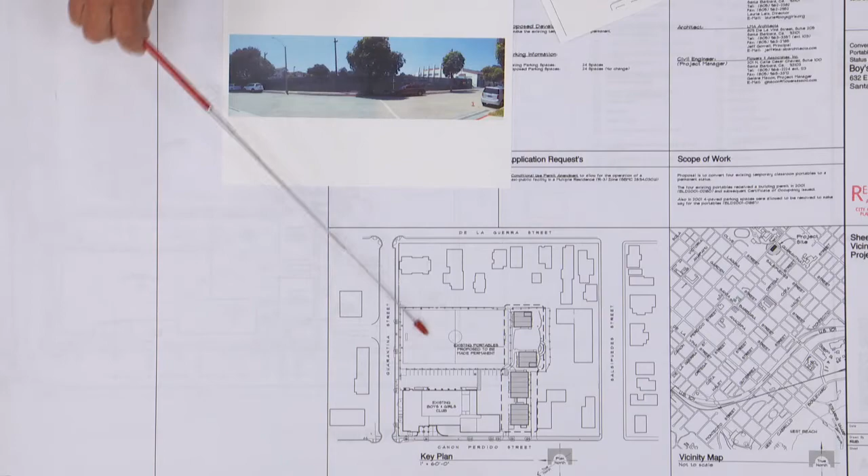What you're looking at here is a photograph taken from this street, looking this direction. You can see the fence and hedge along here. The portables are on the opposite side. Sorry, this picture's taken from this direction. Oh, okay, so we're not seeing the portables. Yeah, you're not seeing the portables.

Classroom. The classrooms, you can see from, let me see, I'm at Canon Perdido again. This view is looking this direction. That's probably the only prominent view of the classrooms, from Canon Perdido, right at that location.

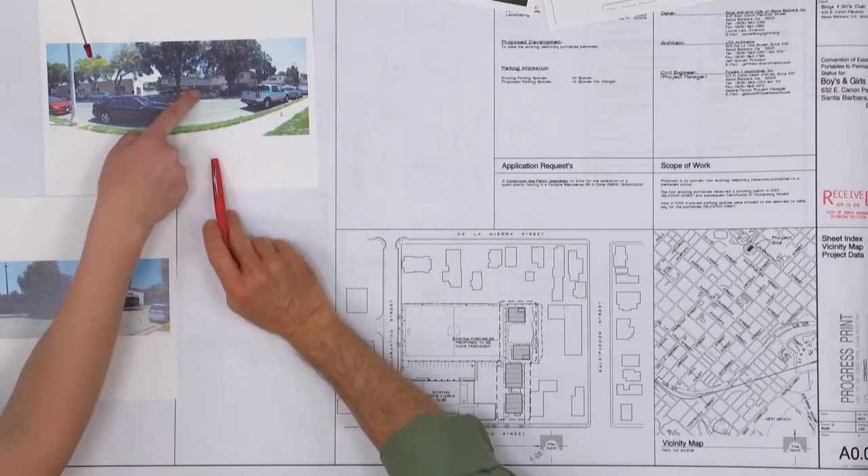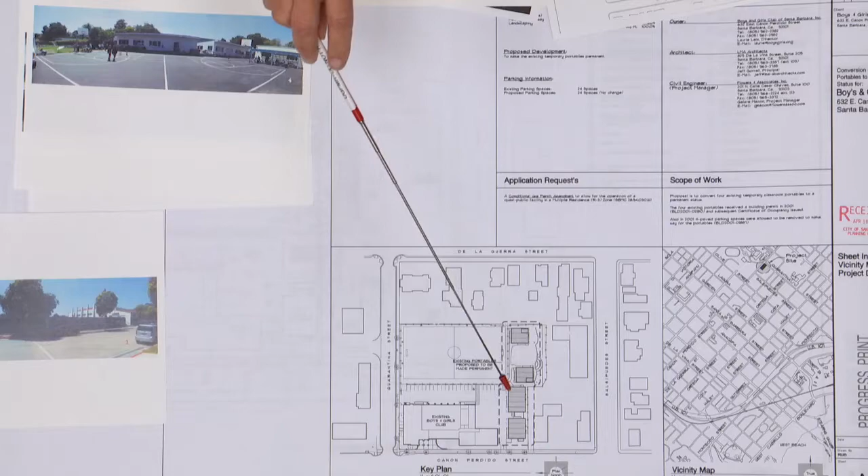And that would be, okay. If you stand and turn around, then you're looking at the high school. That's the view you see there. You go inside the campus, and these are the classrooms, and this is a view looking out towards the play area and parking.

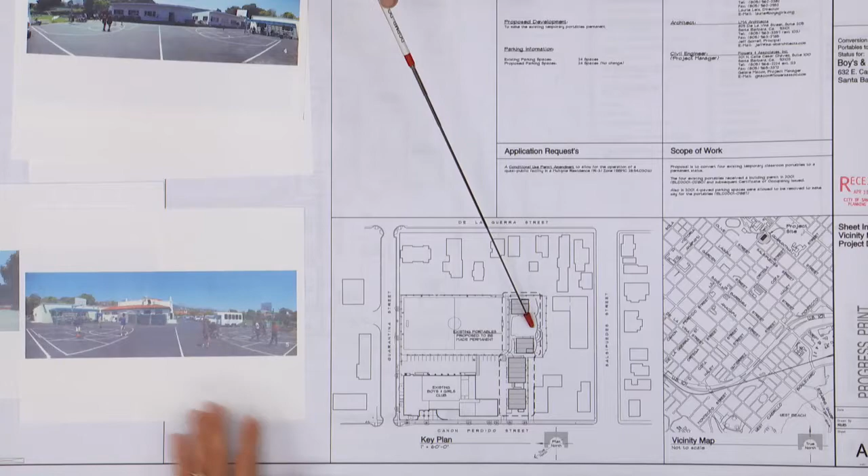Another view. And then I know oftentimes we like to stand on the site and look backwards to see if you can see them, they can see you. This is a photograph standing inside this area of the classrooms, looking back out this direction. And there's a tall hedge there. That's this picture. That hedge you see is a tall hedge right here, and that's the corner of the classroom right there. Correct.

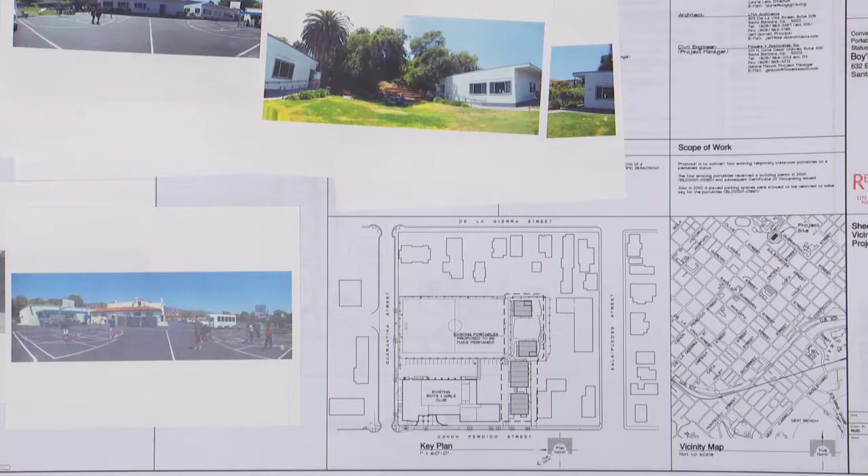There's an apartment complex up at the top of a pretty steep hill here. This is a view from the classrooms looking back towards the apartments. This view is standing in the parking lot looking back towards the houses. Another view from inside this area.

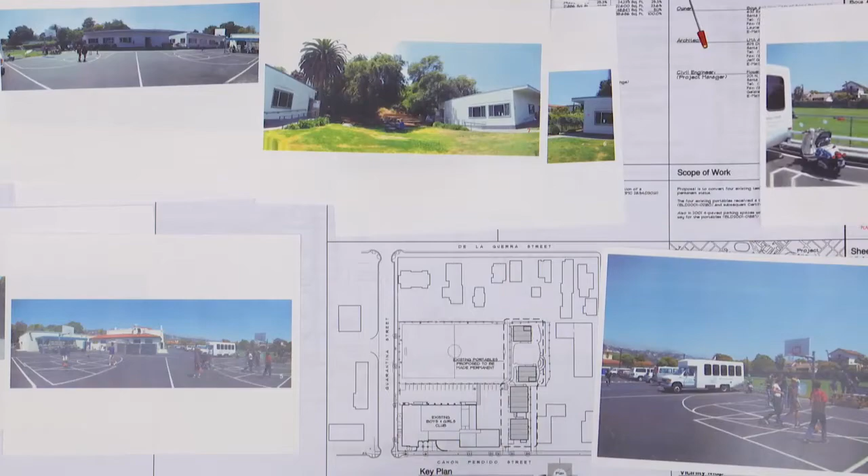And then this view is what you see as you're driving by on Canon Perdido, driving this direction. The portables, or classrooms rather, are back in here. This is a view as you're walking along the sidewalk looking this direction.

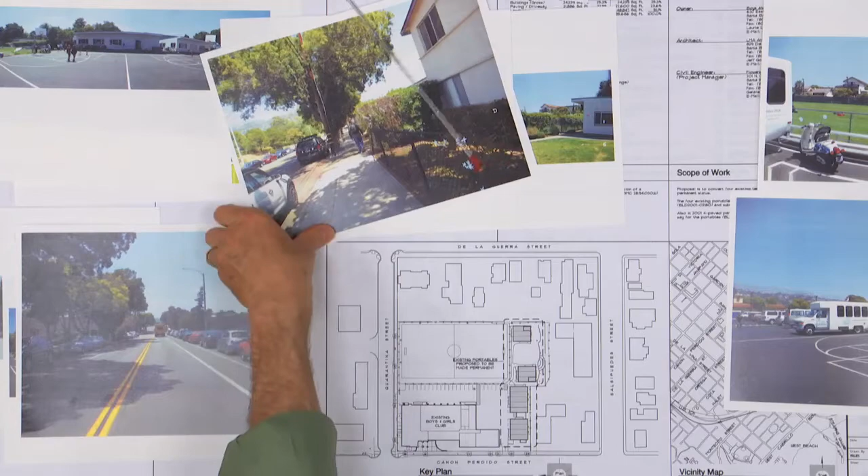The apartment complex that is right next door—this is the view if you're walking on the sidewalk looking this direction. That's the apartment complex, and the classrooms are right around the corner. This last view is from Canon Perdido, looking up the driveway of the apartment complex. There's a high hedge along here, and then it drops down for visual sighting of the cars as you go by.

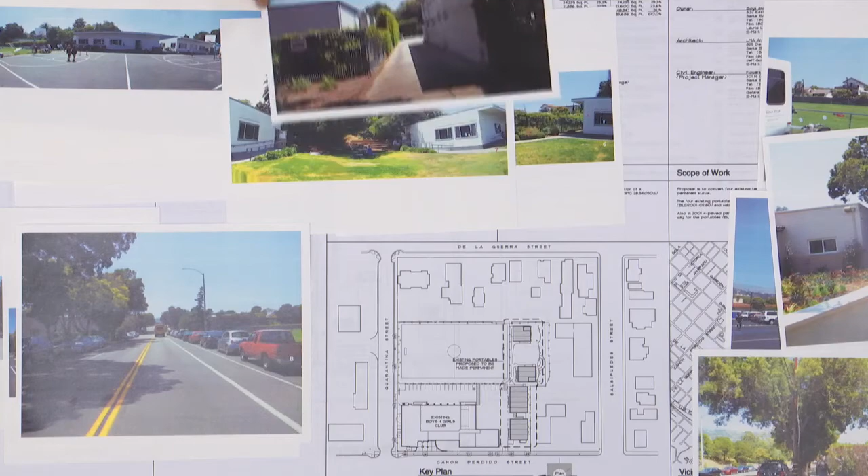So really, there was one photograph looking straight on in this direction. That's really the only view that you have that's of any real consequence, I suppose, in terms of the public viewing it.

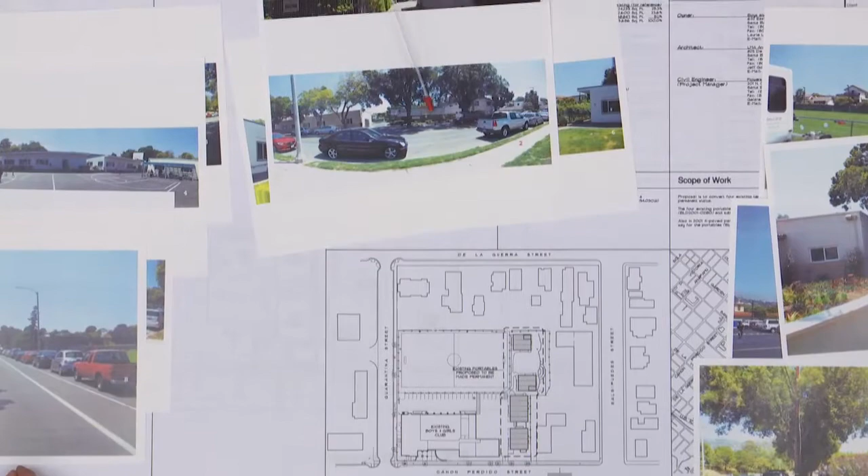So it's a little bit hard to see, but there's a fence in front, looks like. That's right, there's a fence in front, and a little bit of landscaping. These two trees are those two. That's correct.

How about from Salsipuedes—is there a view looking back towards the classroom? There's not. This is a very, very steep hill up this direction, so you can't see anything.

So I think that's pretty much it. What we would hope for is if perhaps you could see any enhancements and support the classrooms. Are you proposing any enhancements? We're not proposing any enhancements—we're coming in as an existing facility, hoping to make the classrooms permanent. And if you could see anything that would be of help.

This thing? Well, this is the same street. The view from Canon Perdido, would it be this one? I thought it was. That would be the view, at a right angle.

Does that complete your presentation? It does. Okay, so we'll open public comment. Is there anyone here that would like to comment on this project? Yes, we have one.

Are these going to be—you need to come forward, and we need to get your name. My name's Sarah Robinson, and I live at 6... You need to speak into a microphone and take a chair. This is my first time, sorry. It's all right, she needs to speak into that. Applicants can move to the seating momentarily while we're taking public comment; the applicant has to go into the audience again. So, yes, my name's Sarah Robinson, and I live at 615 East De La Guerra.

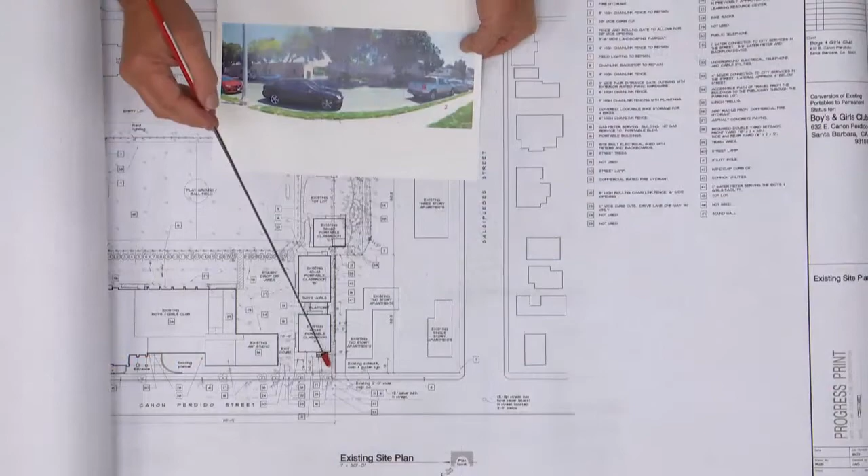This fence along Canon Perdido Street shows better in the photo. Can you point out on the plan where that actually is, where it stops and starts? It's somewhere in here, I think about right in here. Is it out at the sidewalk, or? It's back, not right at the sidewalk. It's back right about here.

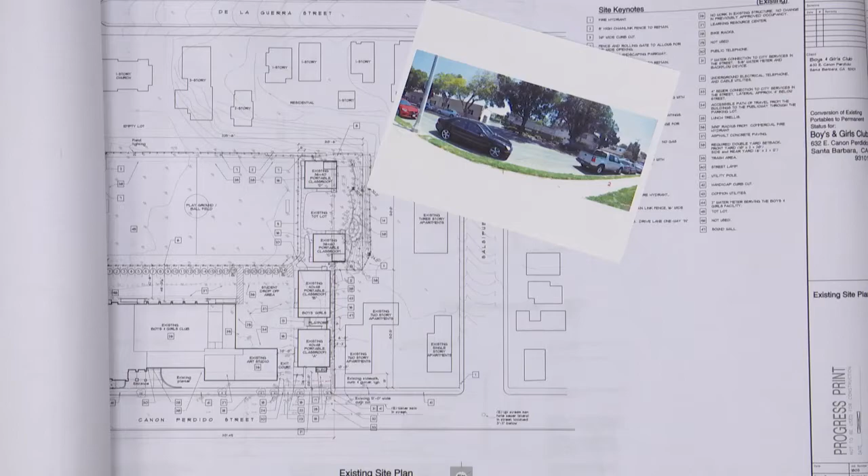It's kind of in line with the art studio, is that right? Somewhere back there, yeah. Is there a hedge in front of it? There's some, I don't know if those are yuccas, kind of hard to tell from the scale of the photograph. This one you can see it - there's no hedge, just some vine, and there might be yuccas in there. Is there any lighting in that area? Yeah, there's lighting on all the outsides of the portables.

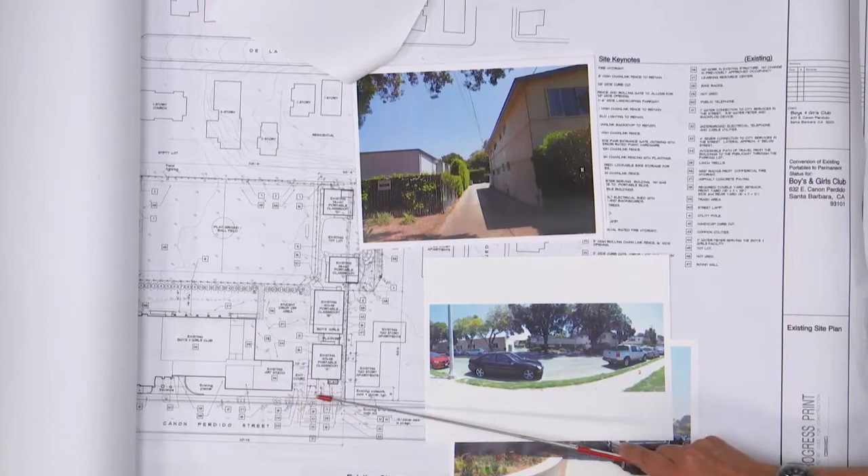From what I see on these photographs, you don't have much landscaping. Along here, or along here to this corner of this permanent building, is that correct? Would you be willing to commit to enhancing that landscaping?

We already have plans. We've written a grant to Santa Barbara Beautiful, and we're in the final stages of them helping us with the project. I think they're going to provide irrigation for us, hopefully, we'll find out within the next week or so. I've been talking to Duke, and once they put in the drip irrigation, we had to pull everything out because it was high water, and we're trying to be observant to low, drought-tolerant plants. So we pulled everything out. We're getting drip irrigation and putting in drought-tolerant plants, we've already done it with the front of our building, but we're planning on extending it to that part too.

So will you be including that in these drawings? Because you're not really supposed to be doing landscaping of an existing commercial facility without getting a permit. Oh, yeah, no, we just pulled out the stuff because the sprinklers were spraying all over. Sure, that makes sense - green water, yeah. Okay, thank you, no other questions.

Was the fence installed as part of the temporary structures? That's been there, I think, for a while. Jim, has that been there for a while? I didn't hear the question. The fence in the front - was it installed as part of the temporary or permanent classrooms? At one point, yeah, since 2001. Okay, the answer seems to be yes.

I guess these were installed for temporary use. Was there a plan to renovate the main building, and that's why these were put in? That's my frustration with this project. El Montecito came in with grand plans to build a permanent structure, and these were going to be temporary. Then they abandoned it, and we're left with the portables. Then Providence came in, and the same thing happened - they had grand plans to build an extension, they were going to pay for it, and then they couldn't get the funding. So now we're trying to make use of, maybe, hopefully we can raise money in a capital campaign, but for now it would be great to have these for our kids or the community to use for other interests.

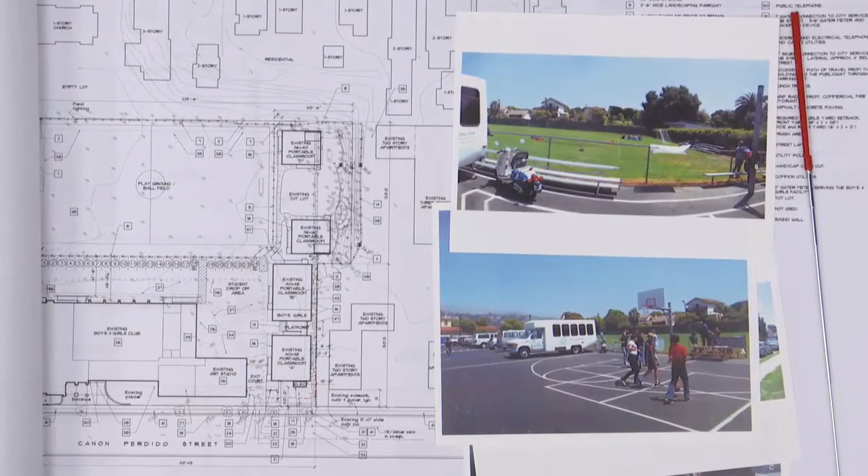Well, I don't have one looking directly behind it. What you're referring to, put it so it's under the camera. If you get back behind the portables, it's so dense with vegetation that you can't see anything.

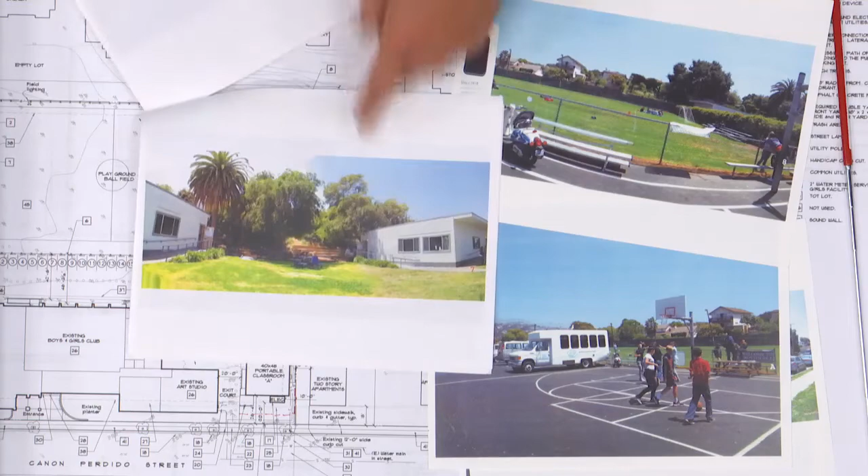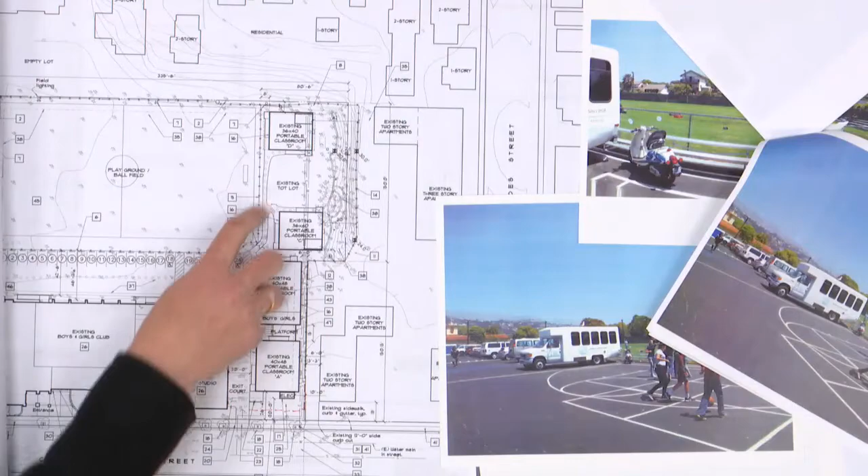It's kind of like this, where we're looking back at the apartment complex. I guess that's the part I was trying to clarify, because she was saying they were trimmed down and she lost all her privacy after that landscaping was done. Her home, I think she was saying, was over here off Salsipuedes, to the east of Building D.

Did she leave? I think so. Oh, I'm not sure which one it was - one of these properties along here. Yeah, because there's nothing been cut down through here, it's very dense vegetation. If you look on the survey too, a little closer, there's a tree there, but it's on your property line according to the survey, and the fence is actually on the backside of the tree. So maybe she was confused, assuming because the tree was on the other side of the fence that all that was on her side too.

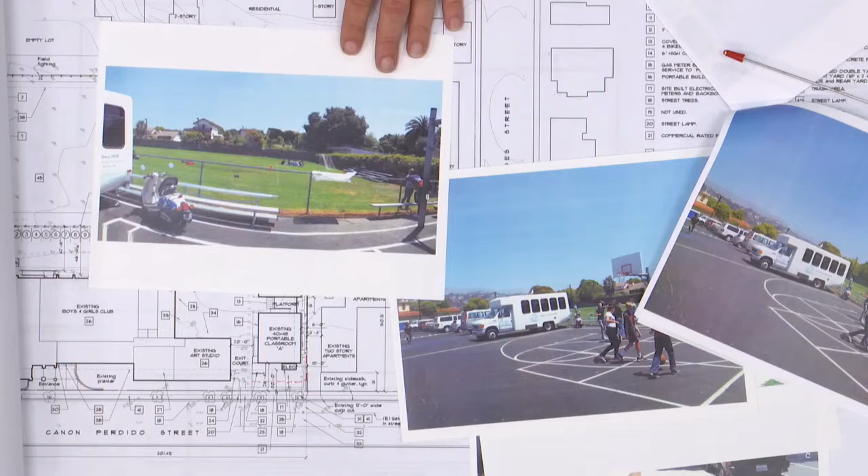I'm just curious if the vegetation's still heavy there, or if it's possible to see anything. It is heavy, yeah. Okay, no further questions.

So these were permitted in 2001 and built in 2001, or in place? I think they were in place from 2001 on. Okay, so 17 years they've been there - been there a while. And the temporary nature of it, was it a 10-year period they were permitted for, or what was it? 3 years.

Madam Chair, they were originally approved as 3-year modulars because the original plan was to propose a new formal permanent building. Since then, they've had trouble getting the funding together to build the permanent school, so the city's worked with them and provided extensions. But at this point, we've been saying this is going to be the last extension. It's a hard spot to be in because it's such a good use, the collaborative effort between a nonprofit school and the Boys and Girls Club.

So their solution right now is to see if they can keep them as permanent. Once they submit for DART, it'll go through fire department, SWMP, ADA accessibility. So although they're not proposing anything, there might be some things that will have to be addressed as we proceed. But they wanted to come in today and get comments from you guys to see if it was even worth going forward with trying to keep these permanently.

I see, it's a little awkward. Thank you, that was helpful. All right, comments, Howard?

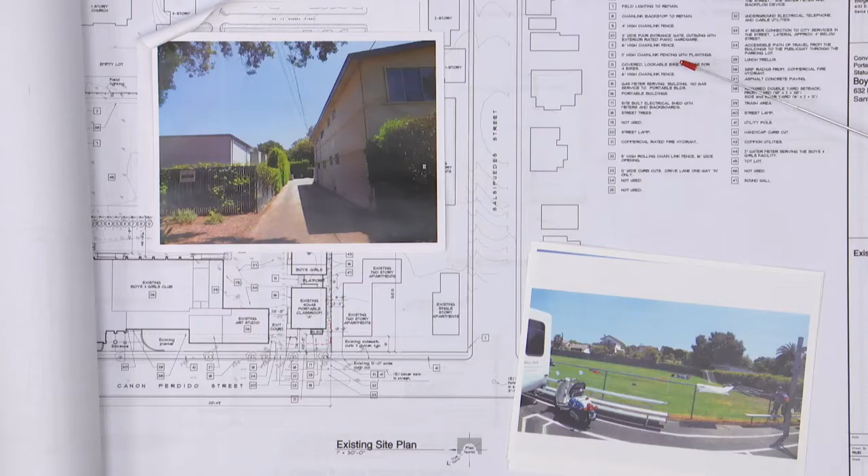I think that just some maintenance on the buildings need to happen, especially in this view where it's close to the street - the fence looks like it's temporary. I would say either install something that is more permanent, or you could go the planting route where you could plant it out so it's more of a hedge in front of the chain link that you don't need. But I'm kind of in the same thought process as Bob, because we do see a fair amount of temporary structures, and then you always wonder if they're going to become permanent structures.

It's just a way to make sure they still have the integrity that we hold all the other projects to, basically, that come before us. But I think that some maintenance would help. I could support these staying in use for another period of time. Okay, David?

I agree. I think the only aspect that concerns me is the long-term effect. I think there's potential for it to create a precedence where other applicants who come by see this same type of proposal and say, oh well, you guys were able to do this at the Boys and Girls Club or whatever project it may be. We've seen things like this even at the desal plant, where they had a temporary structure, so it's come up.

I don't know how that gets rectified, and I think from other situations we've had a hard time establishing how that even gets worked into the approval. But I would support it. I'd be more inclined to support it if it has some kind of programmatic goal, to keep it loose - it doesn't have to be a defined master plan or anything like that, but just the intention that they will eventually become something more permanent, or they will be something permanent.

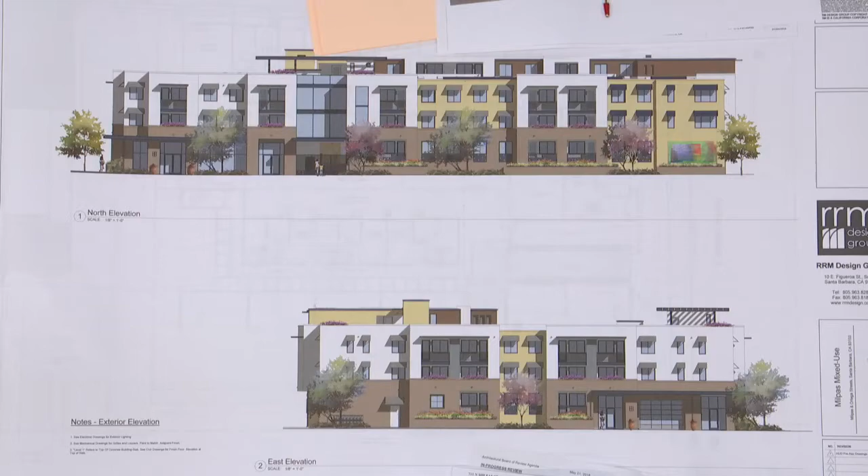Do we have that previously approved? We do, and in the back here I've included a site plan.

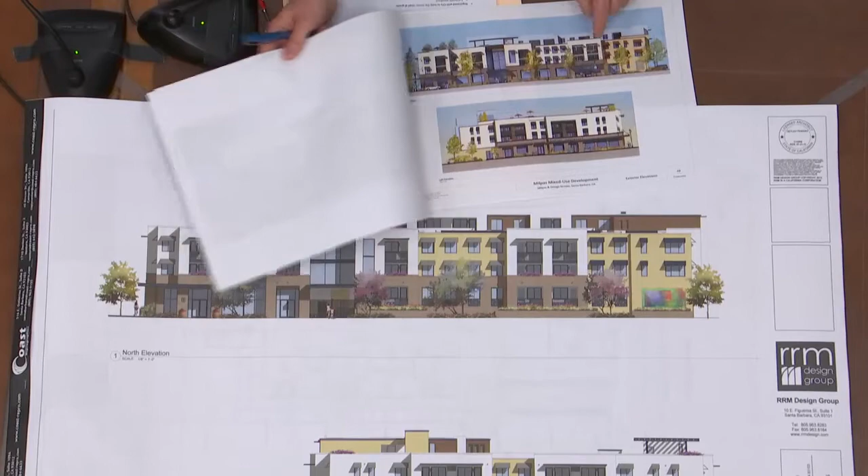I was searching for them and was unable to locate them, so in the 8.5 by 11 I sent you are the former elevations. These 11 by 17 are the former — well, you see the proposed. This is an earlier proposed version when it was kind of red plaster, and then these are the elevations with the brick. The final? Yep, the final, approved. So you can compare these with these. We opted for 11 by 17 so you can see them both together and go back and forth.

Lastly, this is the final, approved previously in 2016. The board had requested that the ground floor be brick as opposed to plaster. I think we had shown, included in that package, an earlier sketch where we had kind of a terracotta colored plaster, and I think someone made the suggestion, well, if you're going that route, why not just do brick? And then everyone said, yeah, let's make it brick.

We'd like to propose plaster. Santa Barbara is a plaster city — all the finest buildings are plaster, it's a wonderful material. Brick seemed to me like an odd choice. There is that one brick building at Haley and Milpas, and then further down by the freeway there's one smaller storefront, but it seemed like an odd choice. I don't remember ever in my 4-year term on ABR ever mandating that a project be built out of brick. So it's a different board. We'd like to just take the temperature of the board and see if there's any consensus that plaster would be an acceptable material for the project.

We have landscape plans if there's time, and we can go over details, but in the interest of saving your time, we'd like you to focus on these biggest changes and get your feedback on that. We'll be back for a full final review at a later date. So that concludes the presentation.

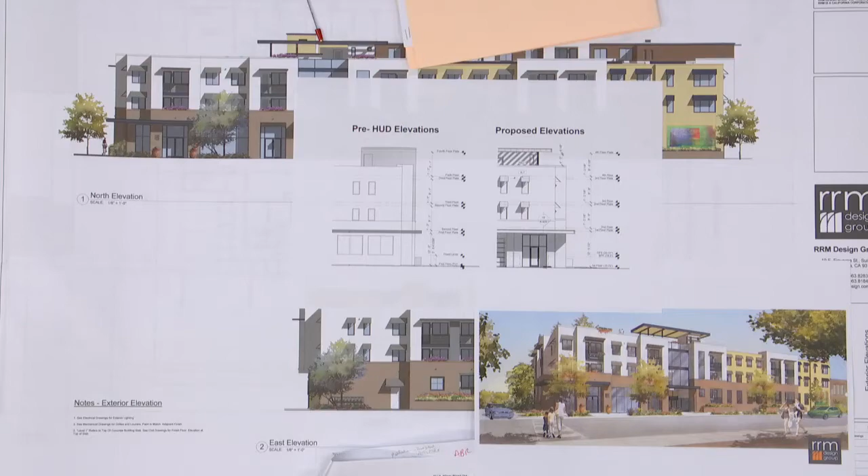And you set the building back? We moved this wing of the building back to the side of the entry, back 3 feet. It was important to have some uphill buffer on the Milpas side, the wing back. Exactly, yeah. And as Milpas heads up that way, it's already transitioning to more residential.

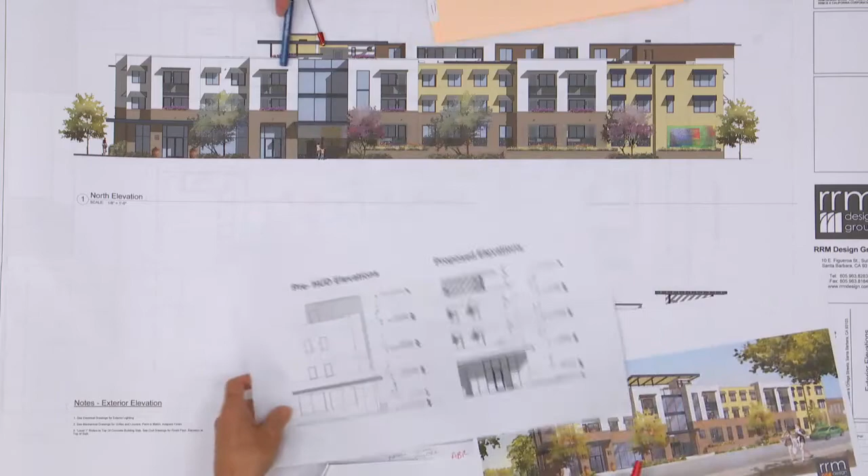What is the material of your awnings, and did they change? They are still the corrugated metal that was approved, with a metal frame. And then there's some sunshades, which are kind of prefab aluminum awnings up in various locations. Prefab aluminum, like what does that mean? They're a boxed awning with fins inside them that screen the sun. I see, okay.

There's no fabric other than the umbrellas that you show on the roof? It is, I guess, a fabricless building, yes. The fabricless building.

And did you modify the parapet detail? We did, well, we modified several details. One of the main things we did at the back of the project, Howard, you have to get flipped to the elevations, I think, in the sheet.

So the back of the building, this was a uniform height back here. We ended up popping up a piece of parapet to help modulate the edge of that, which works well for our crickets behind there, for the gutters and things.

So the parapet height changed a little bit. I think we were able to pull this gutter down, and this is still the max parapet height. And that's just a clean plaster edge with no flashing.

So there's one that's clean plaster, and then what is the detail of this other one that has a reveal or shadow? The other flashings are painted sheet metal.

These scuppers are not functional? Those are the overflow scuppers from the decks, and they're kind of a brass decorative tongue element. They're kind of cool. And so then the height of this parapet is determined by the 42 inches required from above the roof decks? Decks, yes. And that's the same as the entitled drawings.

No further questions. Okay, thanks. Kevin?

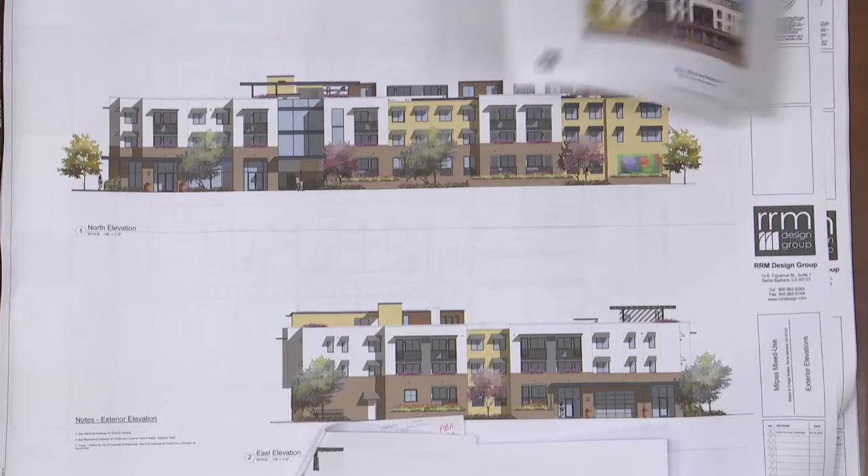Yeah, while we're on the elevation, so on the previously approved color elevation sheet, does somebody have one of those? Third sheet in here, on what's called the front elevation, which is Milpas. If we compare that to the new north elevation or proposed, what's going on the top floor?

There was some vague description of what's going on up there, now there's some more development. Is that different? Well, it's the exact same. I think this elevation took some artistic liberties and faded it back so you could read what you really see from the street, from above the parapet back, that's on the other side of the courtyard, so you're looking over the top of the building. So it's not anything you would perceive from Milpas. But the design is essentially the same.

Are the materials, there's some horizontal siding kind of recessed back in there, is that all consistent with the last design? Correct, yeah. If you look at the back side of the building before and now, it always had the horizontal siding, it turns the corner and wraps back facing the junior high. It's just not shown here, it's ghosted out. And it may have been shown in a section view at another point, I'm not sure.

About the brick, I mean that was originally a veneer, probably, of some sort. A lick and stick, yeah. And is the desire to change truly an aesthetic issue, or is it a budget-driven issue, or is it a bit of both? You know, it's all of the above. It's this design with so many piers and recesses doesn't lend itself to applied veneer brick in the corners and getting the modules to work out. And frankly, we didn't think the brick was the best option visually. It feels odd for Santa Barbara, honestly.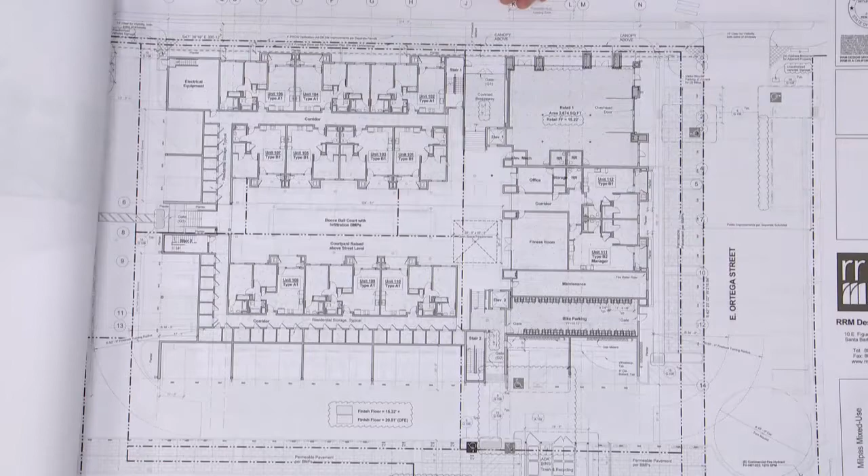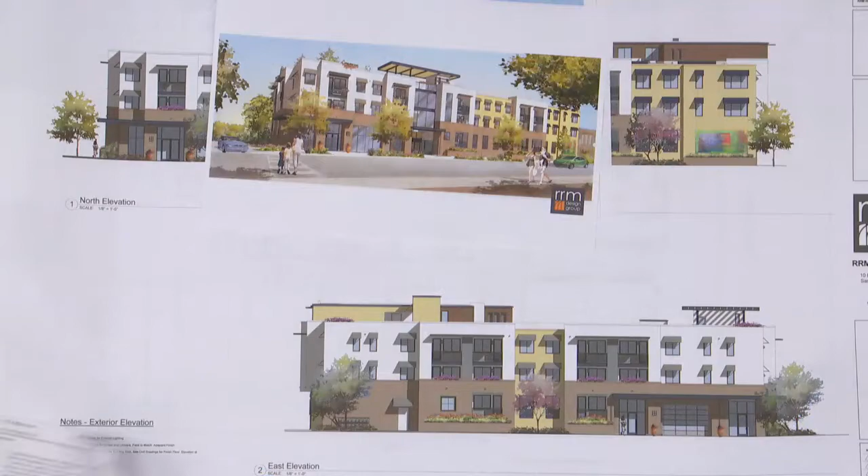So there's a canopy that projects out several feet, and then set deep within that is a decorative gate. A visitor would walk up to this gate, ring the buzzer, get let in, and then walk under the building and up some stairs or the elevator. Exactly correct, you can walk up to the courtyard level or hop on the elevator right there.

And once we went that direction, it felt really nice to be able to look through and see light through the building and the prospect of a green courtyard in there.

Then this glass railing looks like up top there. That went from a metal work to some sort of glass. Yeah, it's a glass railing at the top of the roof deck, and we'd love to hear your comments on that. We felt it was a nice continuity, to have the same material all the way up. We're open to suggestions there.

Did the window proportions change a little bit? Did they get a little more square, or are they the same? Are you talking about the commercial or the residential? On the north elevation, in the window fields. Maybe it's the awnings that are making your perception different. They've always been 5x5. The awnings look like they're overhanging a little bit more, maybe that's changing your perception of it.

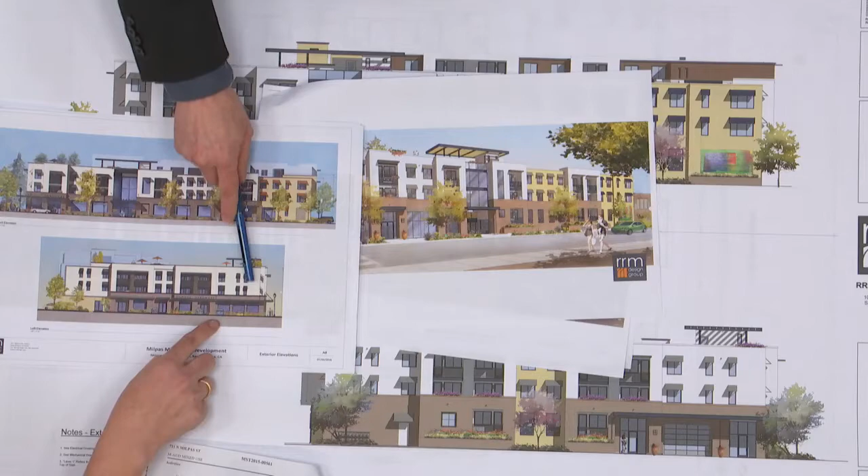Okay, and this is the updated plan. So now further down, there's a parking access that wasn't there before. So we've opted for a big rolling-up garage door to make that retail space flow out onto the street, which might be nice for our tenants. Right here, these are the two new residential units on the ground floor, 5 feet above grade.

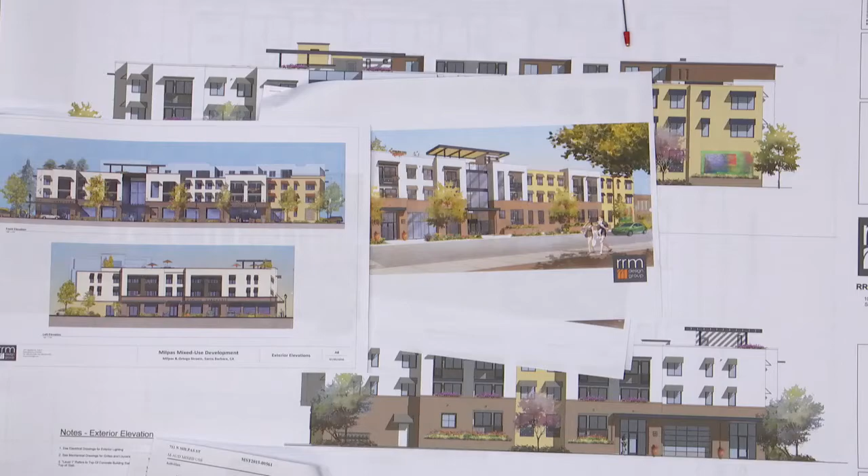Since we're on the atrium, if you look at it real quick, the last time it was approved, the spacing of the channels were a little more evened, and now they feel like they're pulling up towards the top of the atrium itself. Is there a reason for that?

I'm not sure I understand your question. You go to the elevations, look on that sheet. Oh okay, here you can see the two different ones. Yeah.

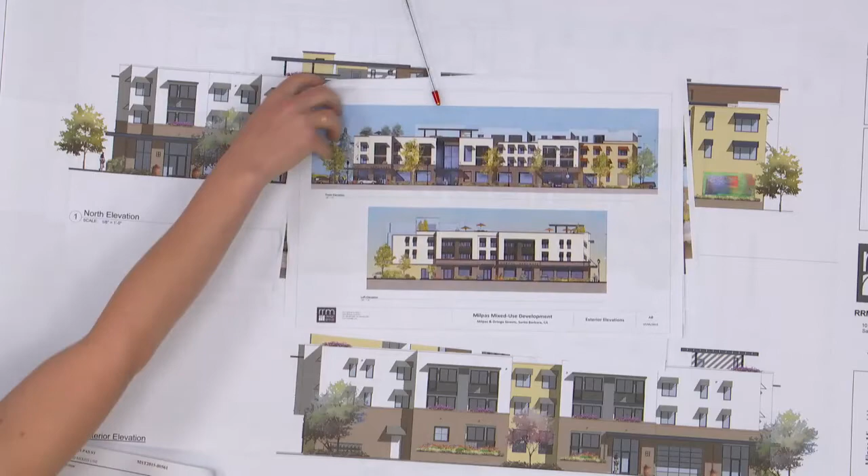Spacing was more even on the last round, looked more balanced, and now it's raised up higher and squishes at the top. And there wasn't glass up there. Yeah, that's something we could study. We could raise it up a little bit if there were issues with wind load and the structure of the curtain wall that needed that intermediate channel to help support it.

On the east elevation, the previous iteration had this piece of metal awning that projects off the wall where the roll-up doors used to be and runs across, carrying over that door. Now it looks like it's pulled back a little bit. Once we added residential units here, the awning didn't make sense to continue over their windows—it'd be so deeply shaded. So we pulled it back to just cover where the residential or commercial portion is, and took it off on that other massing right here.

Yeah, exactly. And I believe one of the comments was to look at removing the awnings at ground level on one of the elevations. We looked at that—they're still there, and we thought about it, and we're open to removing them.

In Santa Barbara, the grid is 45 degrees off north, so everything gets sun at some point. So it made sense to keep them, and visually they're a nice decorative element—they help because of orientation to protect those windows a little bit. There's no true north, so when you say north, it's still getting hit in the early morning.

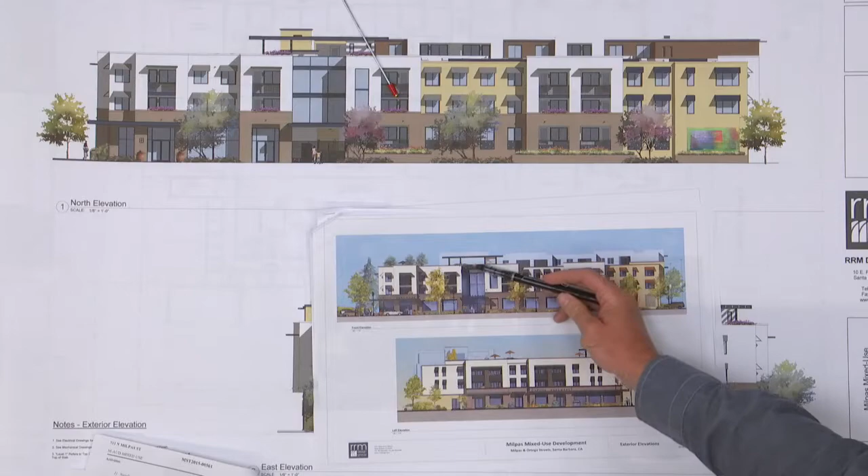Now it's a building that's much more commercial, much more flat and dull, especially in areas like this, that just reads very commercial and very ordinary, whereas this had some unique detail going on there. There was a hint at some textured railing there that could be really nice.

I would really hope that you could add some more of that back into the project. I understand there's financing involved, but it also needs to gel better with the community and not be an ordinary development. I think that was really the bulk of my comments.

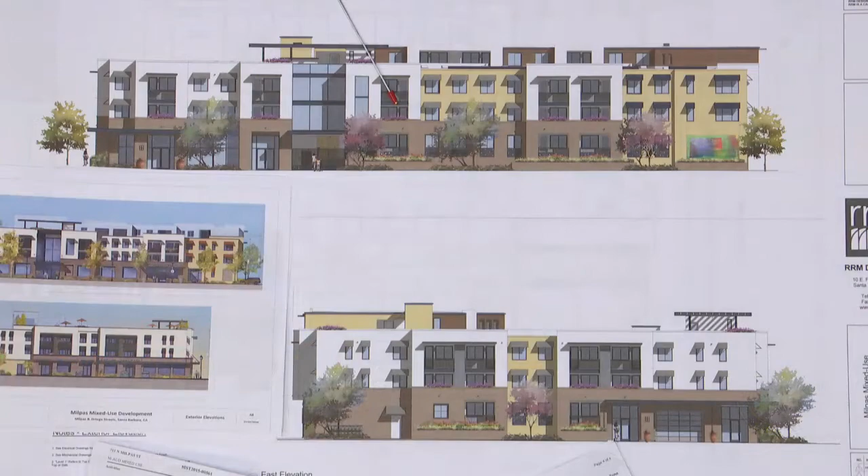I guess first off, I completely agree with what Kevin was saying as far as the materials and how you're breaking up this massing. It does totally change how you read the building, because before we were looking at pieces and how to break up that mass, especially on Milpas.

But also, I think that especially with Milpas being such a pedestrian-friendly street, to lose all the commercial on that street is kind of a loss to the project and the interaction. Looking at this as a mixed-use building, before you had all this glass open to the street, so if you're walking down, there's more of a relationship between someone on the sidewalk and what's happening on that ground level. I think it's kind of a loss for the project and the neighborhood and where this is going.

That's kind of a big piece for me, because before it was really open. Now, I understand what you did and why you did it, but I think for the project and for the neighborhood, it would be a loss to lose that, to lose the commercial downstairs.

And I agree with sort of the rest of the comments about all the detailing and everything that we had seen previously, especially up here at the top where that glass is, and just how everything is coming together. I think you need to take another look at how they separated the building with the colors and materials, and revisit that.

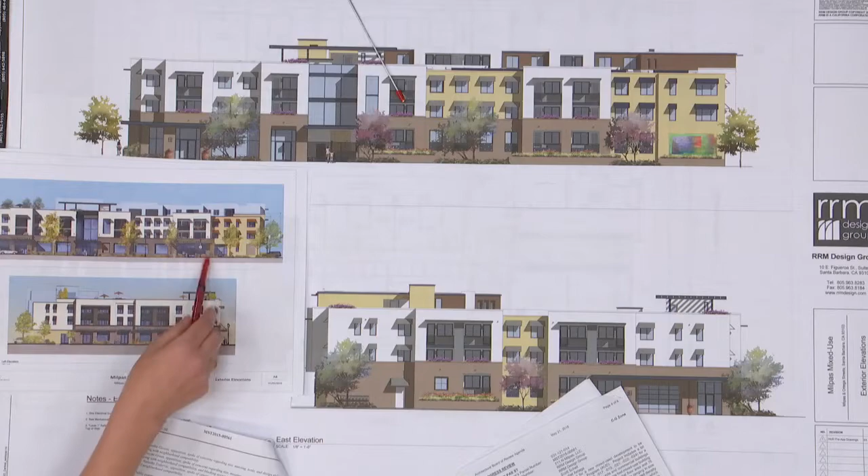Also just look at all the materials together, because you can see in this elevation you can't see the brown siding, and I know you could see it on the other elevation, but I think that's key to simplify. Here there were moments where there was detail, and if some textured material, if brick comes back here, do you still keep the siding? I think that all needs to be looked at together.

But I also just think that losing the commercial space is a big loss. Okay, thank you. David?

I agree with the comments that Board Member Moore made. I wasn't here to review the project originally, so I'm not going to comment about certain things, because it's been approved for PDA. But some elements that you're presenting today, I think, maybe need a little bit more restudying.

When I look at the elevations right now, especially from afar, as if I was across the street or a couple blocks away, it reads a little out of scale. I understand the size of the project, so it's fitting for the program, but as a lot of the board members have pointed out, there's a loss of character in little elements with detailing in materials. More importantly, it loses the dialogue of materials that was happening on the last round of elevations you guys presented.

Amy pointed out the wood, I see that on the third level. So if plaster is, if you're not trying to do the brick at ground level, then maybe there's a material that you already have on site that's already proposed that you start to integrate. Maybe the wood siding starts to come down, but I'm not saying it should, because personally I think that really starts to make it read like a style that's not in place with the area. But there is material that's already there, so somehow that needs to be explored, whatever that relationship is, if these parts can start acting as less bulky and start articulating these pop-outs and articulations a little bit stronger, I think that helps.

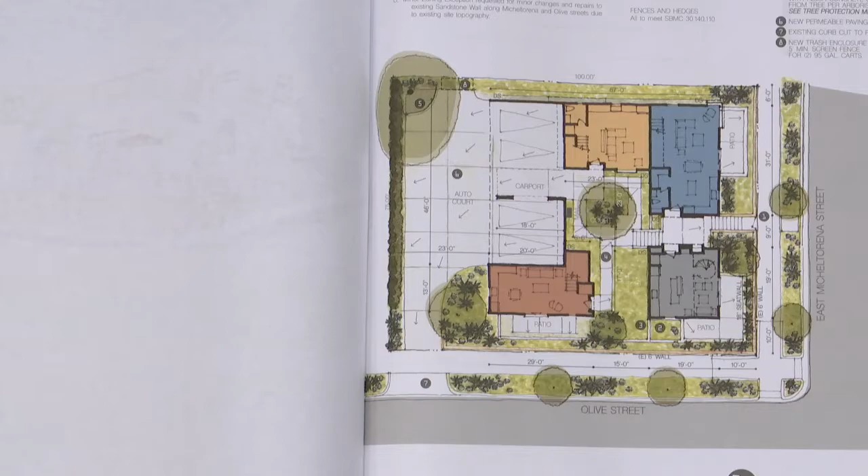We've gotten verbal approval from transportation for a curb that could be flush to not obstruct any car back-out space, and so that's the intent. No trenching or anything in the area, no pavers within that 8 feet. And the auto court is to be determined exactly what product we go with, whether it be paver or a thinner paving system.

Does that complete your presentation? I just wanted to add one thing. In our previous presentation, the majority of the board understood, I believe, what we were trying to present with this. But since I see members of the public here, I'd like to state our case slightly differently than we said last time. What we were trying to show with this map was not that there were necessarily other structures such as this in the immediate neighborhood, but that other neighborhoods in the downtown area with a predominance of craftsman style homes are peppered with examples of buildings such as what we're proposing, which were of the same era as when those other buildings were built. So we think that's why you made the finding that it's compatible, and we appreciate that.

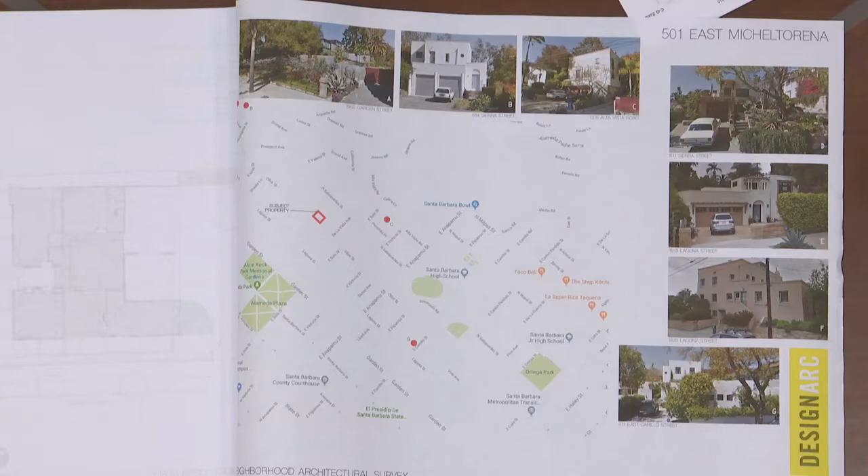Okay, so we'll open public comment. We have, it's like 3 requests to speak, although we have more people present, those additional people have given over their time to the 3 speakers. So we'll start with Pat Saley. Susan Spector is here. No, you're ceding your time to me. Oh, I'm sorry, yeah, so you get 4 minutes.

Thank you, Mr. Chairman, members of the board. I am here representing myself and my family. We live at 1517 Olive, about right there, and Susan Spector lives at 1513, right across from me. This is the 3rd meeting we've been to, and we still feel very, very strongly that this project is not compatible with the neighborhood.

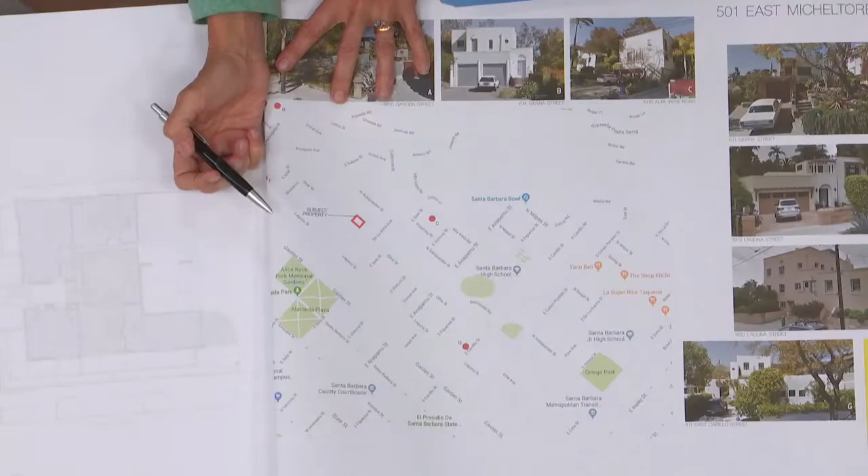And one illustration of that is the primary route of travel in this area is up and down Olive Street. That goes for pedestrians, bicyclists, cars. People come along from downtown, a lot of people make a left up Olive. Many, many people access this area via Anapamu, they go up Olive Street. This is the bungalow district.

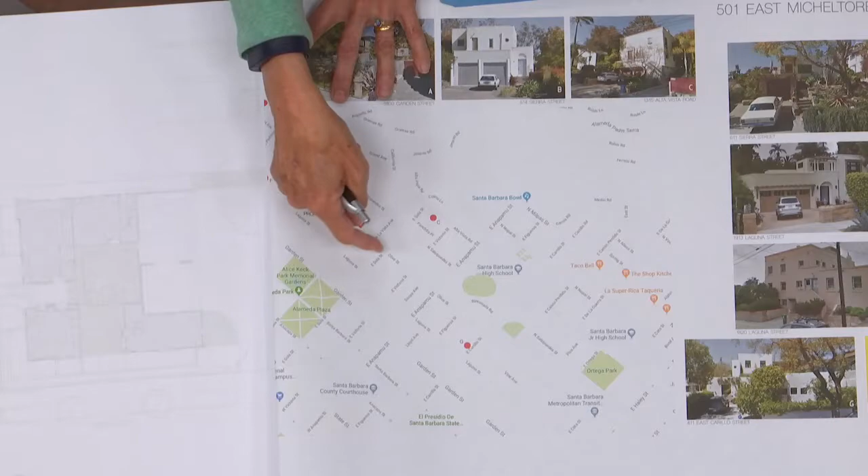It's right across from this site, and one of my neighbors will elaborate on that. And as you come up Olive from Anapamu, that is almost entirely bungalows. There are not a lot of people who turn right on Micheltorena. And I think the traffic counts, we could get them, but they would bear this out. So people are moving up or down Olive, and it is almost entirely bungalows.

Yes, there is a big office building next door to this. That whole area has been rezoned from medical office to multi-family residential. The hospital from which these office buildings were born, I guess you could say, is no longer there. It is probably the most recent development in the area, and it is in a bungalow style that I understand went through a lot of iterations, but it works. It's fairly dense, but it works. We just think it's really a mistake to key off these office buildings, because they no longer have that zoning. They are legal nonconforming uses. They may transition to residential, so we want to keep that residential feel in the neighborhood.

We feel it's unfortunate. At the last meeting, there were only 4 of you, and you did a straw vote because, in my opinion, it sends the wrong message to the applicant. With a more complete board, it's a better reading. You had more members at your February 12th or so meeting, where I thought the board was pretty clear that this project was going in the wrong architectural direction. So we would encourage you to go back to your February meeting notes and send them back to the drawing board to come up with a project that fits the neighborhood. We just don't think you can make the neighborhood compatibility findings for this project, and we feel very strongly about that. Okay, thank you.